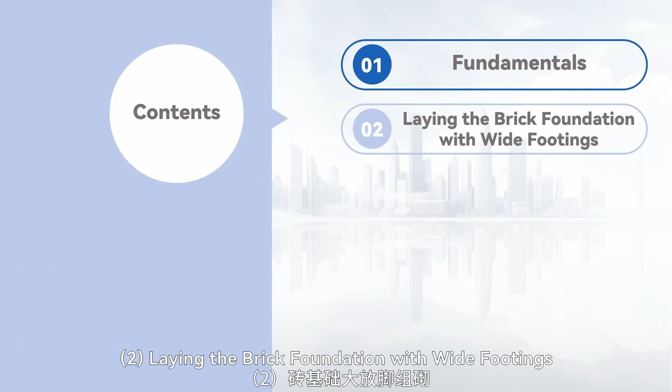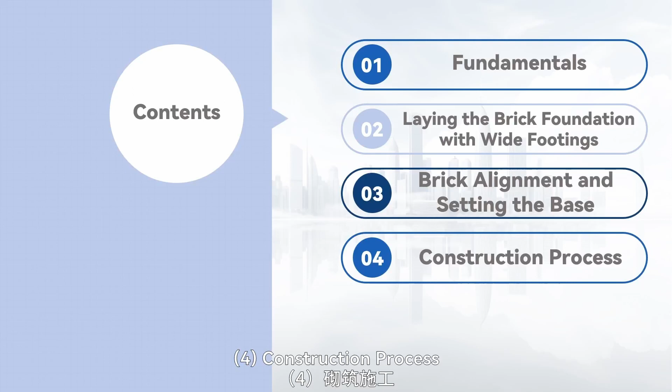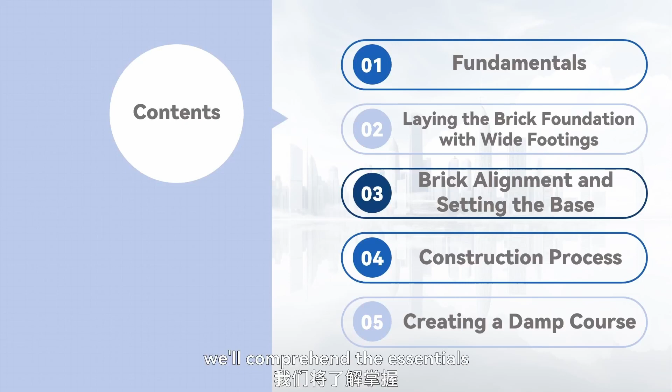Today we'll be sharing about brick foundation construction. This lesson is divided into 5 parts: 1. Fundamentals. 2. Laying the brick foundation with wide footings. 3. Brick alignment and setting the base. 4. Construction process. 5. Creating a damp course. Through this session, we'll comprehend the essentials of building a brick foundation.

Let's begin with the first part, the fundamentals. Brick foundations come in 2 forms: strip foundations and independent foundations.

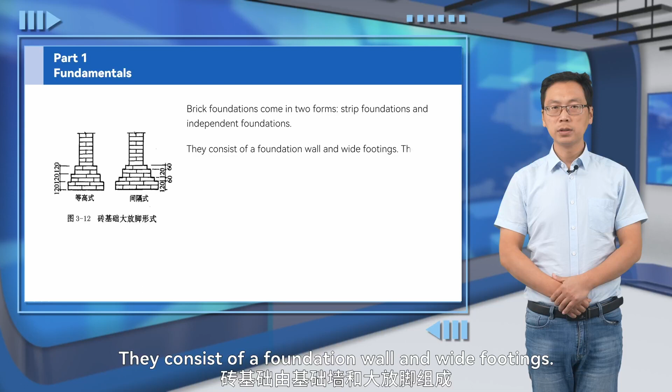They consist of a foundation wall and wide footings. The foundation wall is the same thickness, or slightly thicker, than the wall itself. The expanded part at the bottom of the foundation wall is called the wide footing. Below the wide footing is the foundation bed.

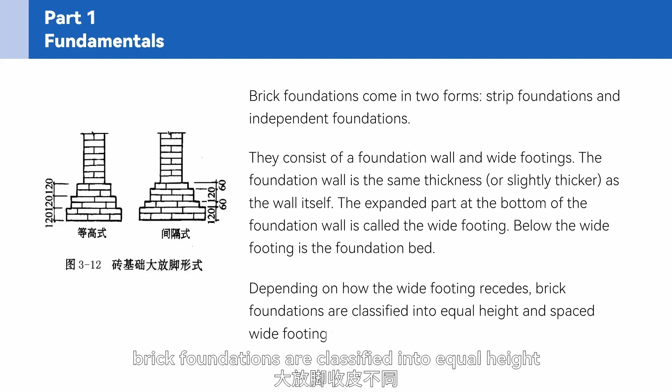Depending on how the wide footing recedes, brick foundations are classified into equal height and spaced wide footing types. Equal height wide footings have a recess of 60 mm for every 2 layers of bricks on each side.

Spaced wide footings follow a pattern where the first step recesses 2 layers by 60 mm on each side, and the second step recesses 1 layer by 60 mm on each side, alternating in this manner.

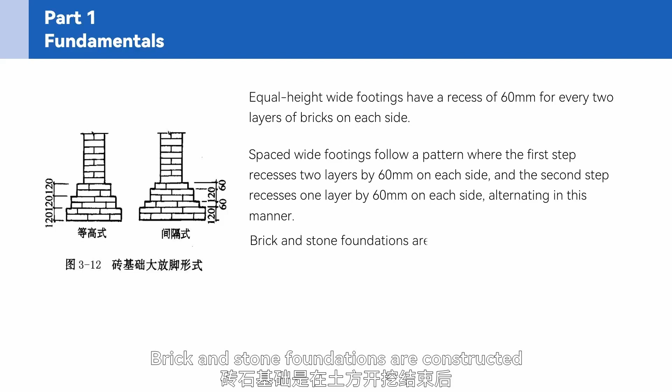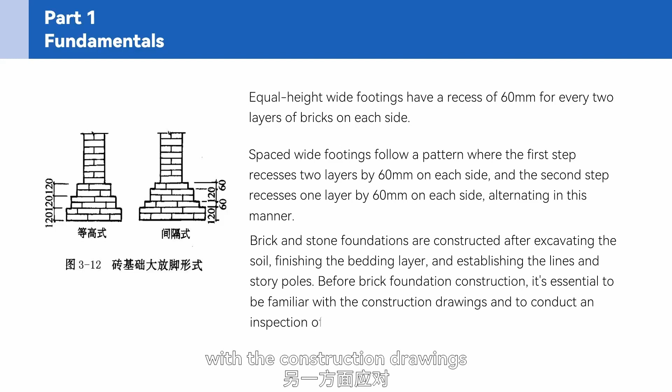Brick and stone foundations are constructed after excavating the soil, finishing the bedding layer, and establishing the lines and story poles. Before brick foundation construction, it's essential to be familiar with the construction drawings and to conduct an inspection of the previous step.

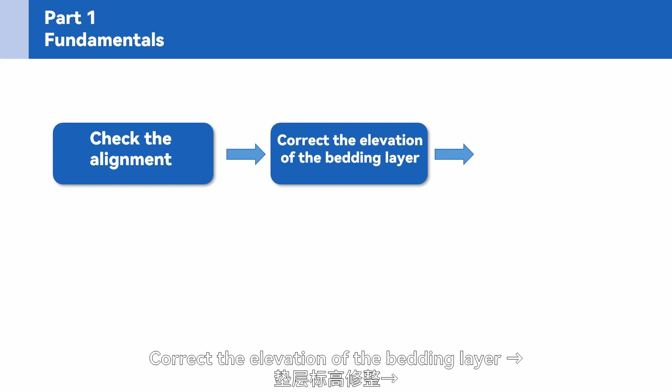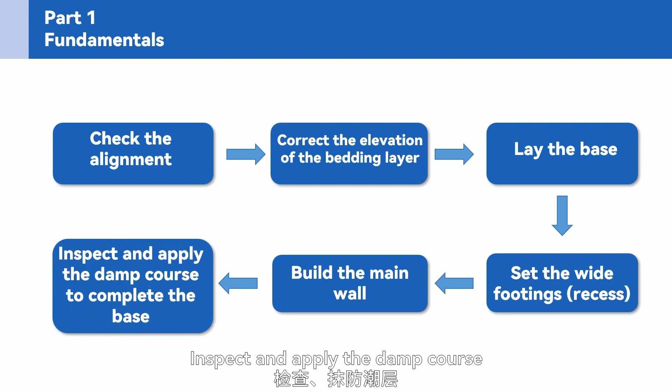The construction sequence is as follows: check the alignment, correct the elevation of the bedding layer, lay the base, set the wide footings, recess, build the main wall, inspect and apply the damp course to complete the base.

Secondly, laying the brick foundation with wide footings and checking the alignment. Before laying the wide footings for the brick foundation, it's crucial to check the dimensions of the foundation groove, the thickness of the bedding layer, and the elevations.

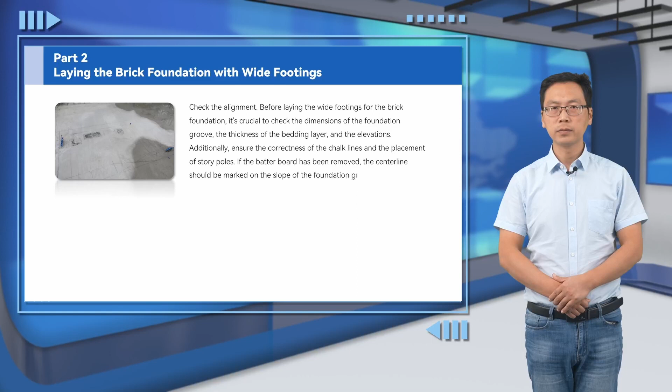Additionally, ensure the correctness of the chalk lines and the placement of story poles. If the batter board has been removed, the center line should be marked on the slope of the foundation groove.

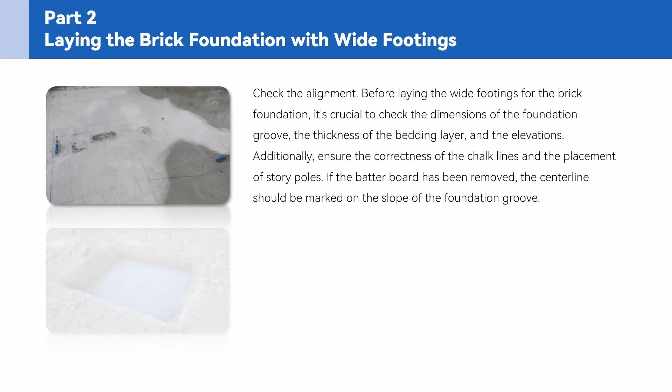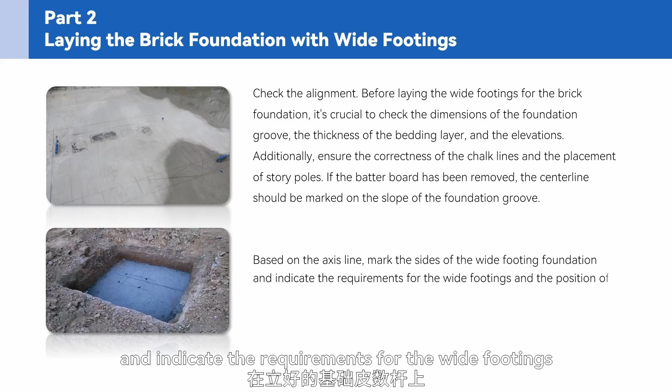Based on the axis line, mark the sides of the wide footing foundation and indicate the requirements for the wide footings and the position of the damp course on the story pole.

When there are no specific design instructions, the wide footings and the foundation walls are generally built using an English bond. Because of the stair-stepping process, the construction is slightly more complex than the wall itself.

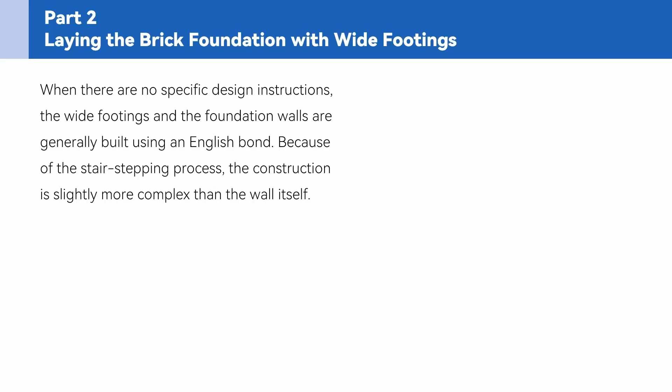The calculation for the width of the wide footing base is B equals b plus 2L. Here, the uppercase B represents the width of the wide footing, the lowercase b represents the width of the wall body, and L represents the width extending from the wall.

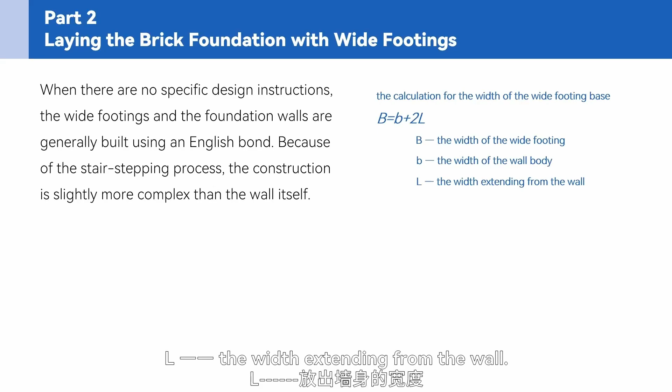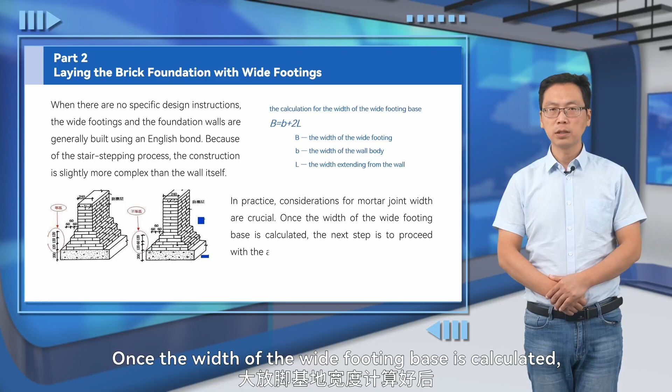In practice, considerations for mortar joint width are crucial. Once the width of the wide footing base is calculated, the next step is to proceed with the alignment and setting of the bricks.

A 1-brick wall with 6-layer, 3-stepped equal height wide footings. This wide footing consists of 3 steps, each with a width of 1/4 brick length, which is 60 mm. According to the calculations mentioned above, the base width is B equals 600 mm, but considering the vertical joints, B is 615 mm.

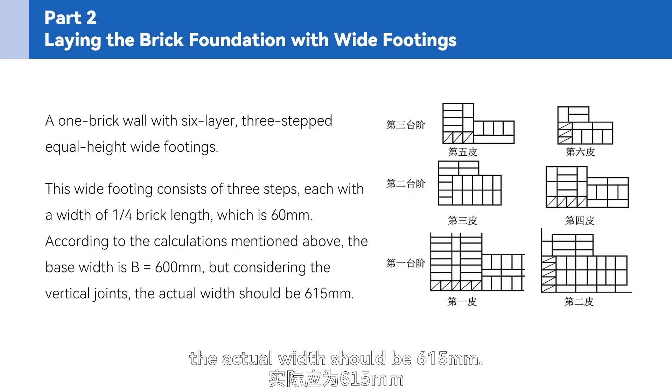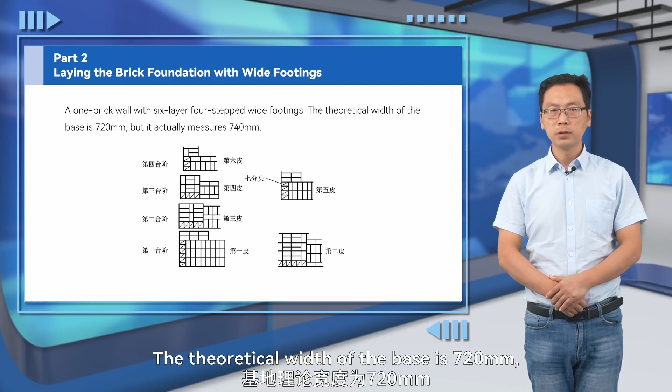A 1-brick wall with 6-layer 4-stepped wide footings: the theoretical width of the base is 720 mm, but it actually measures 740 mm. Its construction method is as depicted in the diagram.

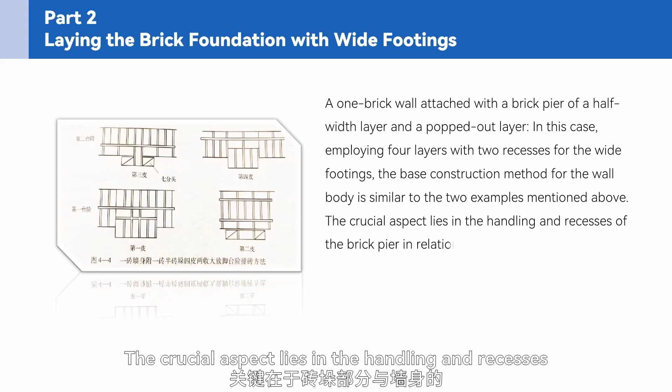A 1-brick wall attached with a brick pier of a half-width layer and a popped-out layer. In this case, employing 4 layers with 2 recesses for the wide footings. The base construction method for the wall body is similar to the 2 examples mentioned above. The crucial aspect lies in the handling and recesses of the brick pier in relation to the wall body.

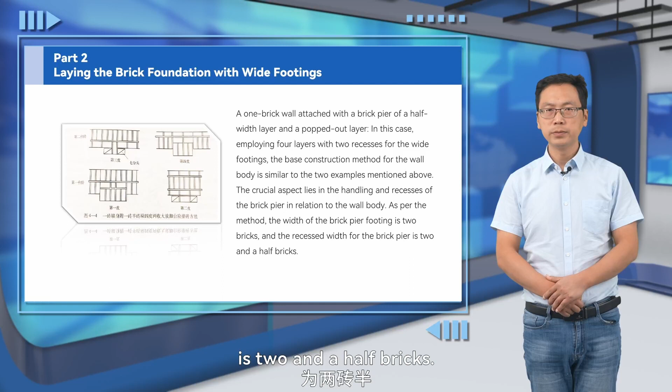As per the method, the width of the brick pier footing is 2 bricks, and the recessed width for the brick pier is 2.5 bricks. The construction method is illustrated in the diagram.

A 1-brick independent square column with 6-layer, 3-stepped wide footings.

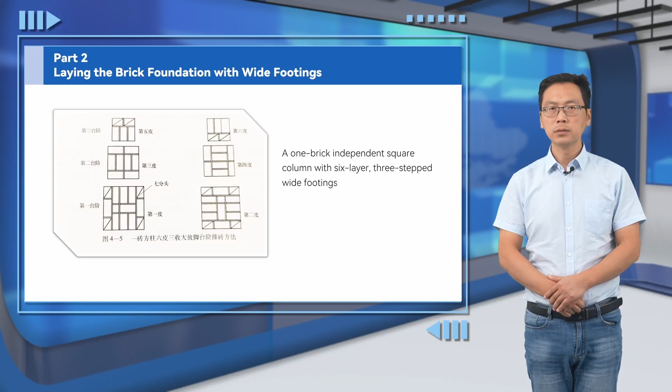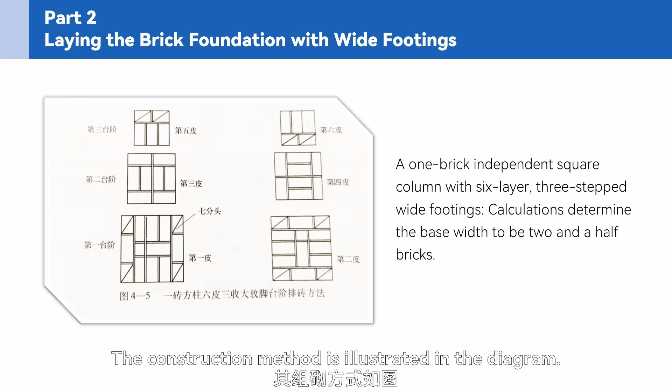Calculations determine the base width to be 2.5 bricks. The construction method is illustrated in the diagram. Thirdly, brick alignment and setting the base.

Aligning the bricks according to the base dimension lines and the predetermined stacking method without mortar involves dry laying the bricks for a certain length, considering the width of the vertical joints. It requires thicker walls to be laid in header bonds, while thinner walls in stretcher bonds, termed as header in thicker walls and stretcher in thinner walls.

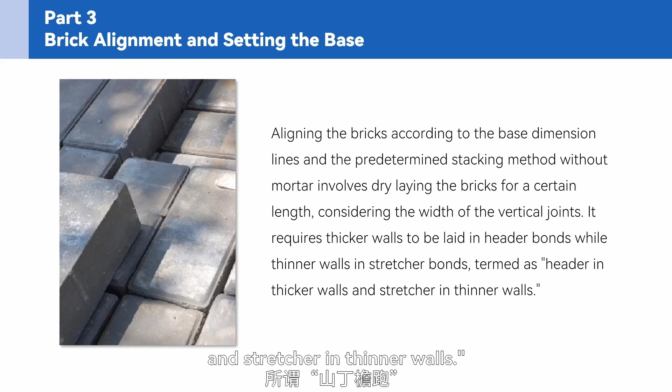The design is based on 100 units, while the bricks are at 125 units, resolving the discrepancy through brick alignment. The task includes aligning various sections such as corners, wall piers, openings, and junctions to meet both brick and design unit requirements, ensuring reasonable joints and convenient operation. Adjusting the width of the vertical joints resolves the discrepancy between design and brick units.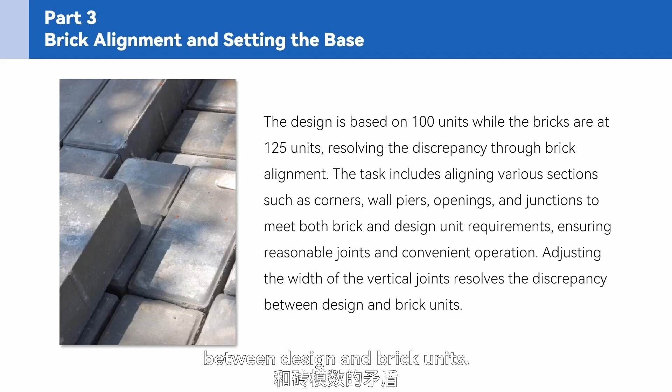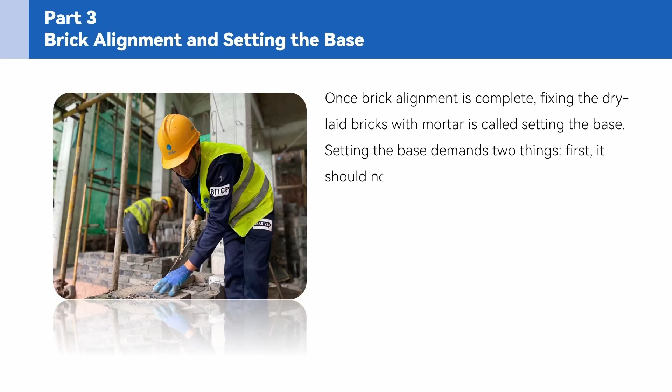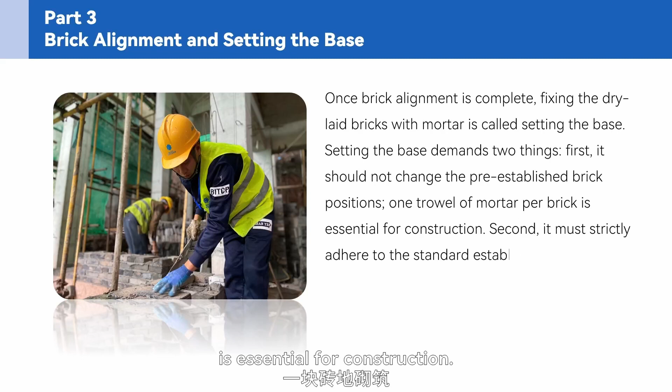Once brick alignment is complete, fixing the dry-laid bricks with mortar is called setting the base. Setting the base demands 2 things. First, it should not change the pre-established brick positions. One trowel of mortar per brick is essential for construction. Second, it must strictly adhere to the standard established by the story poles. Any significant deviations should be handled during the preparation phase.

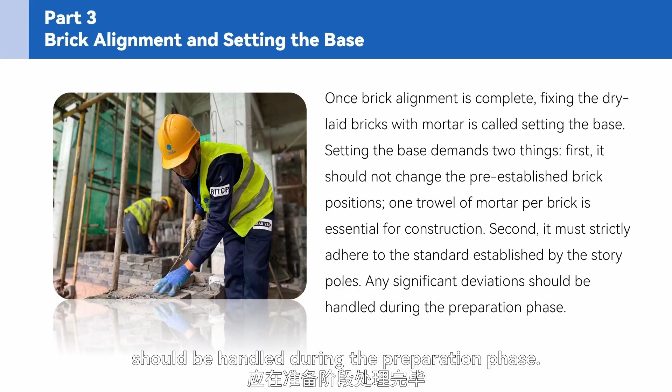Fourthly, construction process, coping.

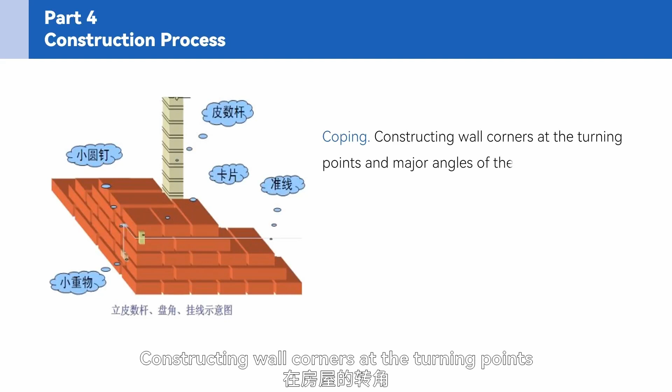Constructing wall corners at the turning points and major angles of the structure. The height of each coping should not exceed 5 layers of bricks each time. Verticality is checked using a line and a plumb bob, ensuring conformity with the established story poles.

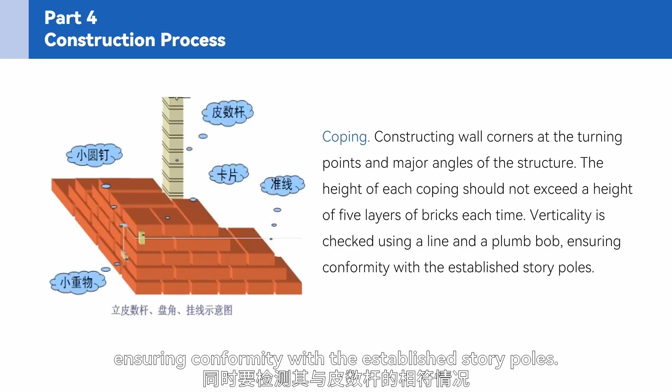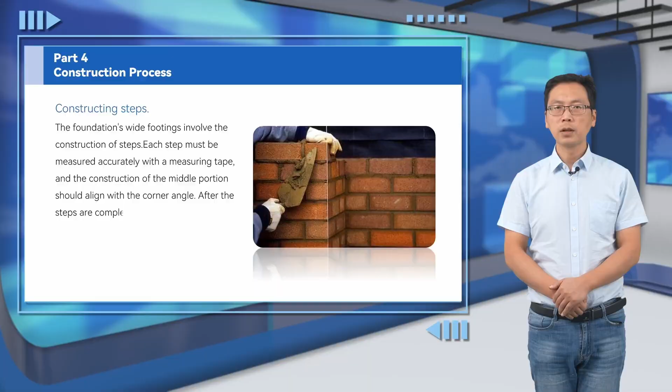Constructing steps. The foundation's wide footings involve the construction of steps. Each step must be measured accurately with a measuring tape, and the construction of the middle portion should align with the corner angle. After the steps are completed, a string line is utilized with a batter board to check the central line of the wall before constructing the foundation wall.

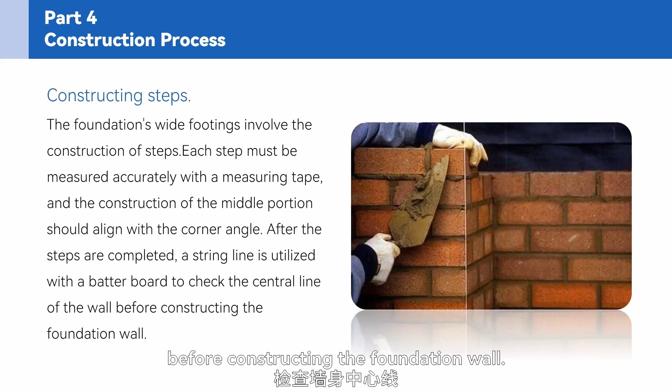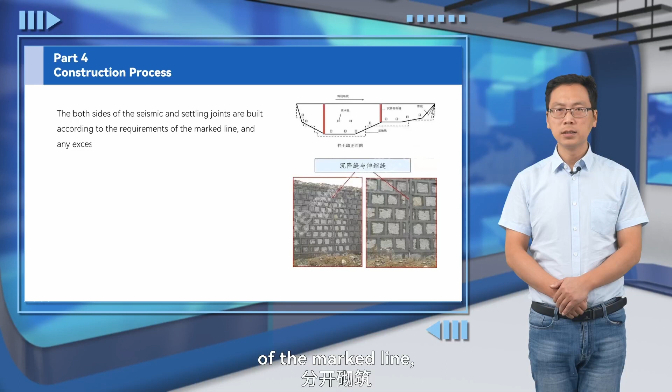Both sides of the seismic and settling joints are built according to the requirements of the marked line, and any excess mortar inside the joints should be handled promptly.

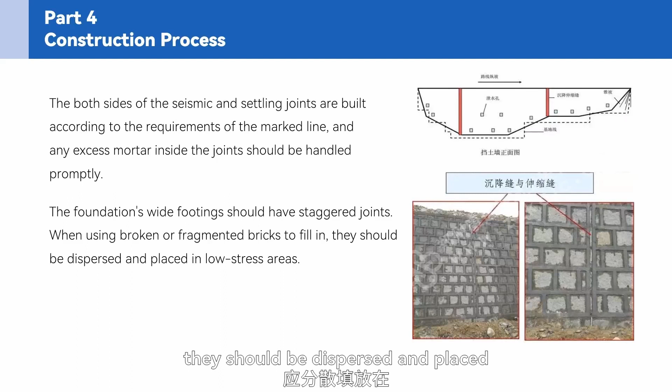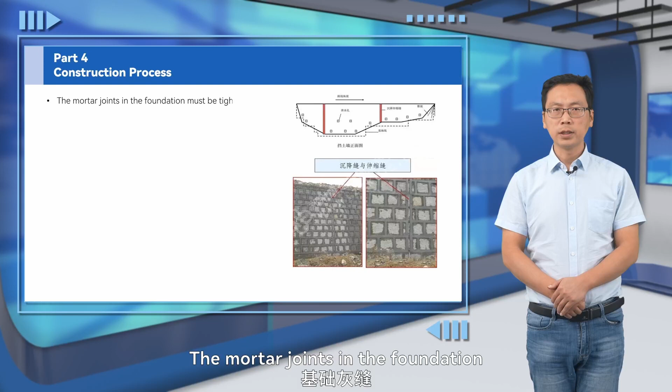The foundation's wide footings should have staggered joints. When using broken or fragmented bricks to fill in, they should be dispersed and placed in low-stress areas. Accurate reservations of empty cavities should be made, and no cavities should be created later. The mortar joints in the foundation must be tightly sealed to prevent groundwater seepage.

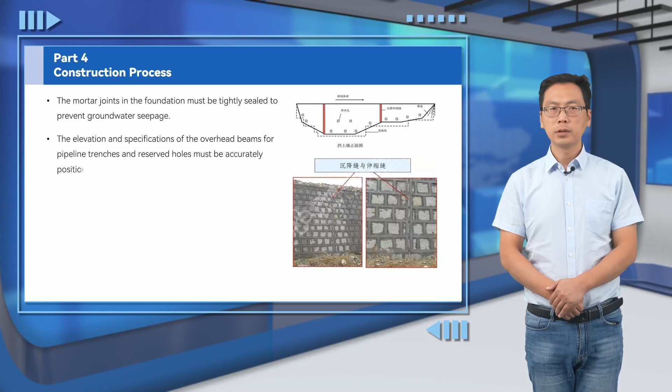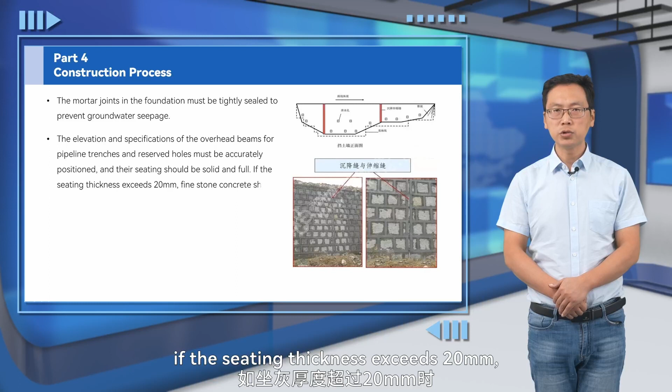The elevation and specifications of the overhead beams for pipeline trenches and reserved holes must be accurately positioned, and their seating should be solid and full. If the seating thickness exceeds 20 mm, fine stone concrete should be used as a cushion.

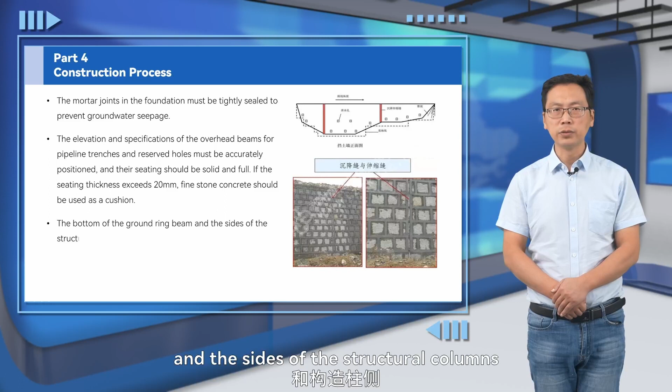The bottom of the ground ring beam and the sides of the structural columns should reserve pass-through bars for supporting formwork, which will be filled and compacted after dismantling the formwork.

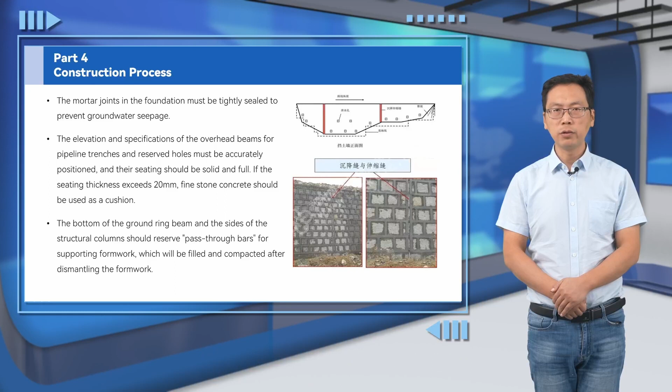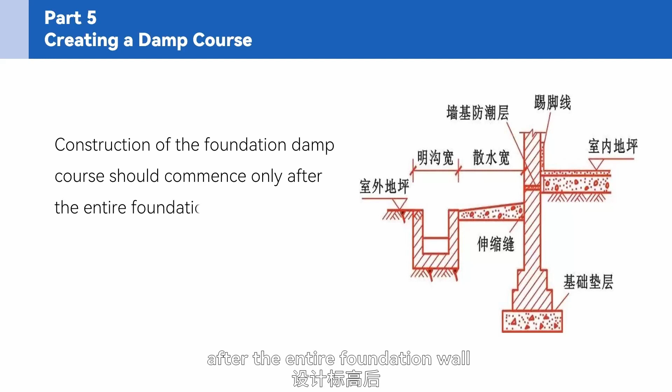Finally, creating a damp course. Construction of the foundation damp course should commence only after the entire foundation wall reaches the designed elevation, preferably after indoor backfilling is completed.

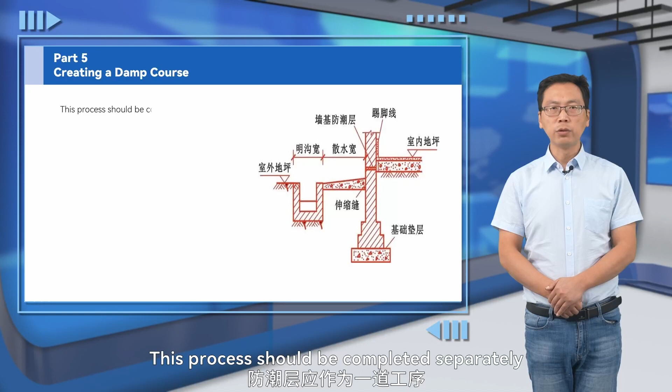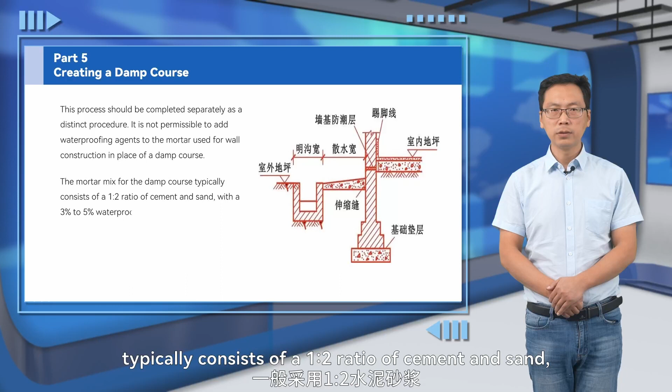This process should be completed separately as a distinct procedure. It is not permissible to add waterproofing agents to the mortar used for wall construction in place of a damp course. The mortar mix for the damp course typically consists of a 1:2 ratio of cement and sand, with a 3% to 5% waterproofing agent based on the cement mass.

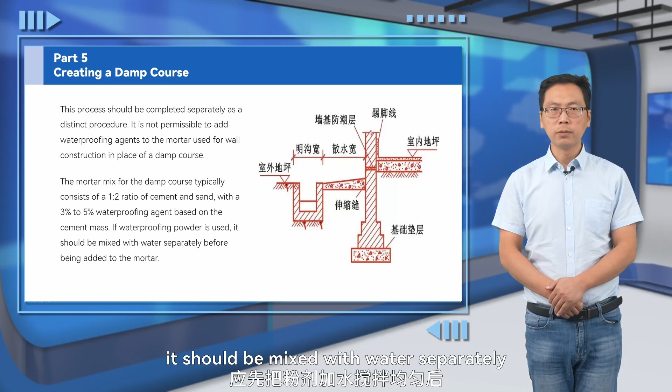If waterproofing powder is used, it should be mixed with water separately before being added to the mortar. If there's a concrete ring beam at the top of the foundation wall, it can replace the damp course.

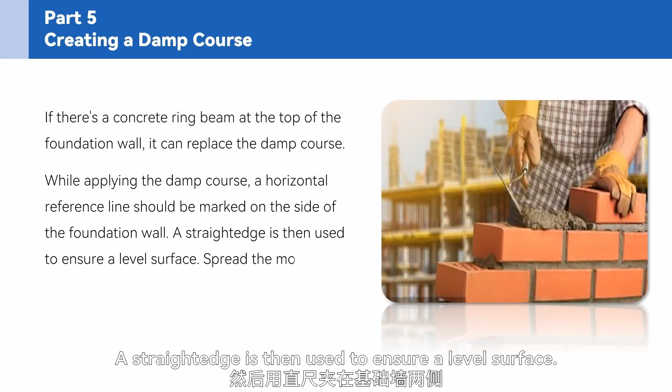While applying the damp course, a horizontal reference line should be marked on the side of the foundation wall. A straight edge is then used to ensure a level surface. Spread the mortar evenly, allow it to be partially set, and then use a trowel to create a flat, rough surface.